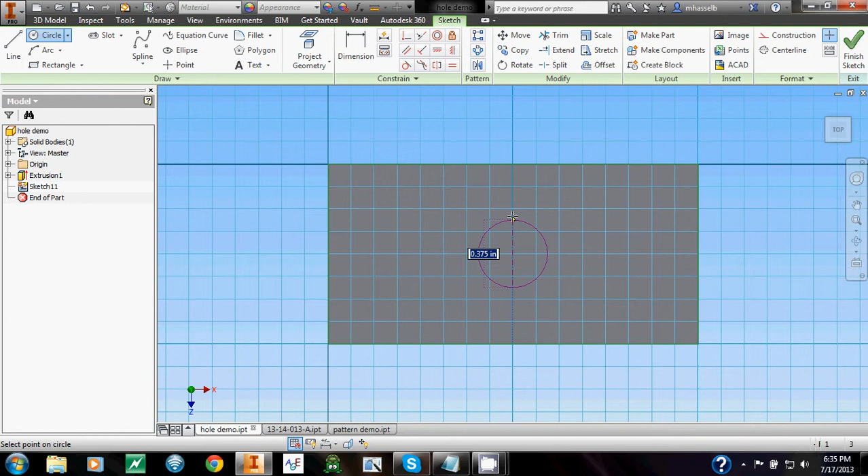So for someone just starting out, you may find that the way to make a hole is by making a sketch, drawing a circle, and making a cutting extrusion. And that works fine, but it has limitations.

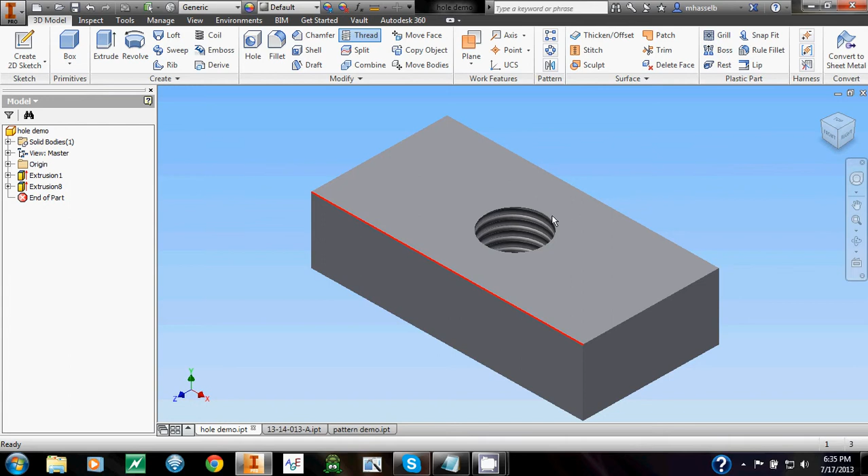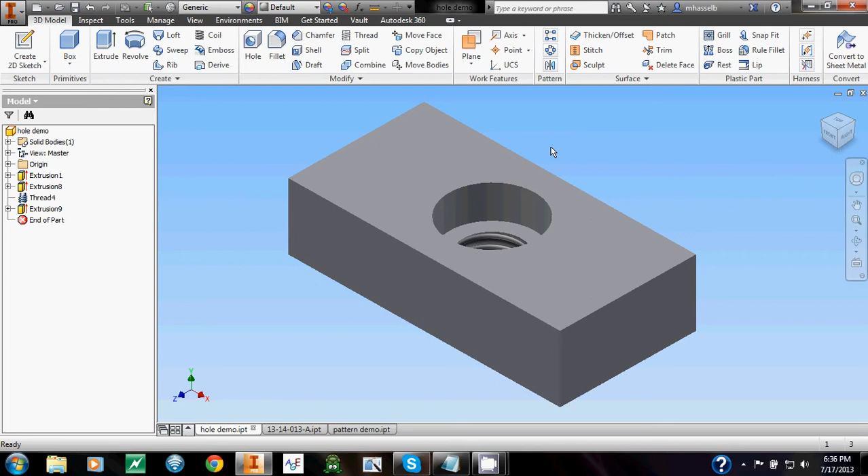Say you wanted to make this a threaded hole. Depending on what thread you want, you may not know how big the diameter of the hole should be. So that's a problem. Also, if you want to make a counterbore, you could also make a circle and extrude that too. Now it's starting to feel like too much work. But say instead of counterbore you wanted an angled countersink, and now it's starting to get really tricky.

So what I'll do is delete the feature and the thread, make a new sketch, and instead of a circle, I want to put down a point. Finish the sketch, and then you'll see this feature appear called hole, and you see it automatically picks up the point you just put down.

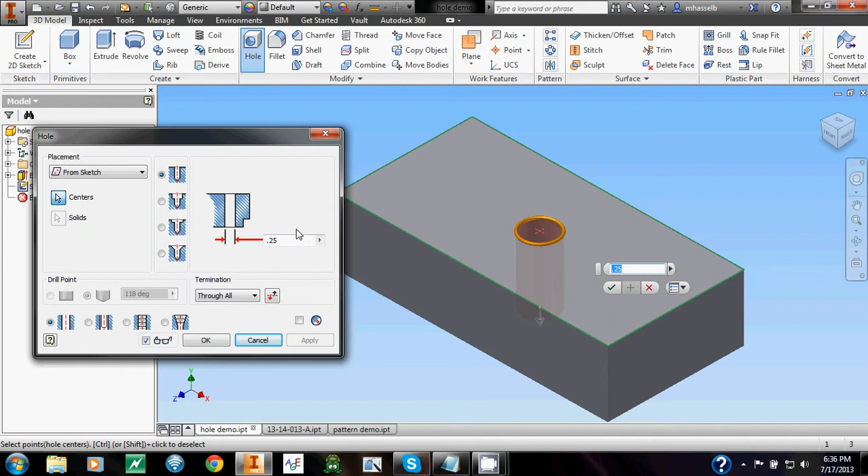It also gives you all these other options. You could make it a clearance hole, give it threads, or this other red thing that I don't know what you would use for. You could make it a drilled hole, add a counterbore, spot face, or countersink, depending on what you want. You can also change the termination and the drill point.

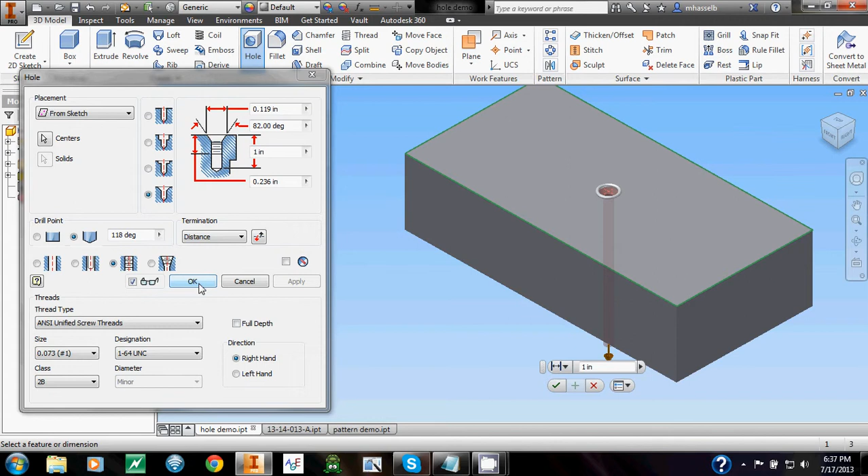So basically everything you'd ever want in a hole is right here, and it's certainly easier than extruding a circle. So now you know how to make holes smartly. Let's move on to patterns with an example.

This is a belly pan, and you'll notice that it has a lot of holes and a lot of triangles. Now you can imagine it would get a little cumbersome to sketch and extrude each of those features individually. I just see a waste of precious time there.

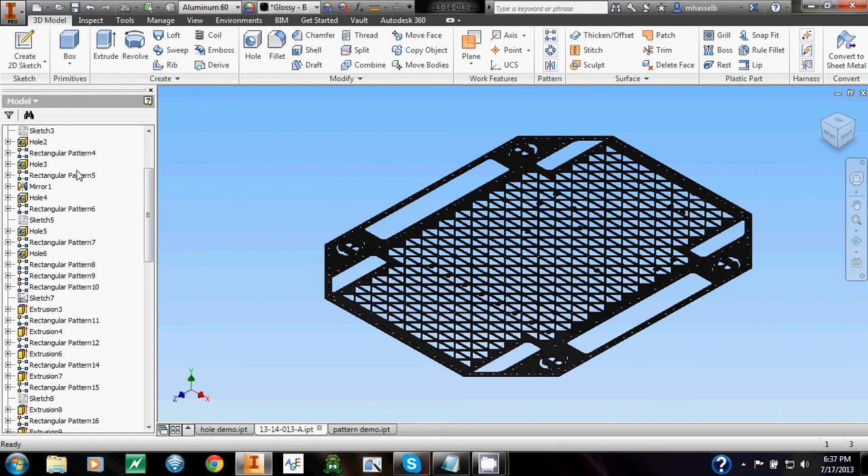So in situations like these, patterns come in handy, and that's what you'll notice in the browser here. This is a sketch I made, and it works well for demonstrating patterns. So I'll extrude this here, use the browser to make the sketch visible, and add some holes.

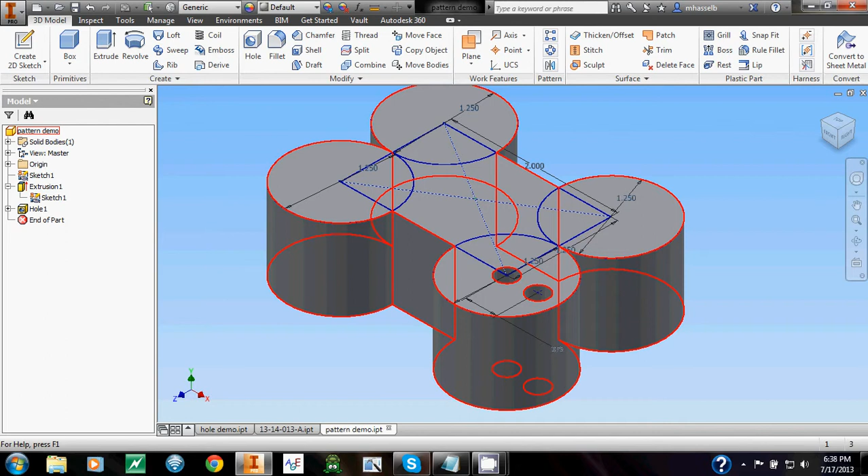So the way patterns work, they're over here. You have different types like rectangular, circular, and mirror. We'll start off with circular. So you see here, you need to choose your feature.

I'll pick the holes I just created, and then you also need an axis of rotation. Once you've done that, it'll give you other options like total number of repetitions, total angle, and whether or not to split down the middle. And so you see how it did that.

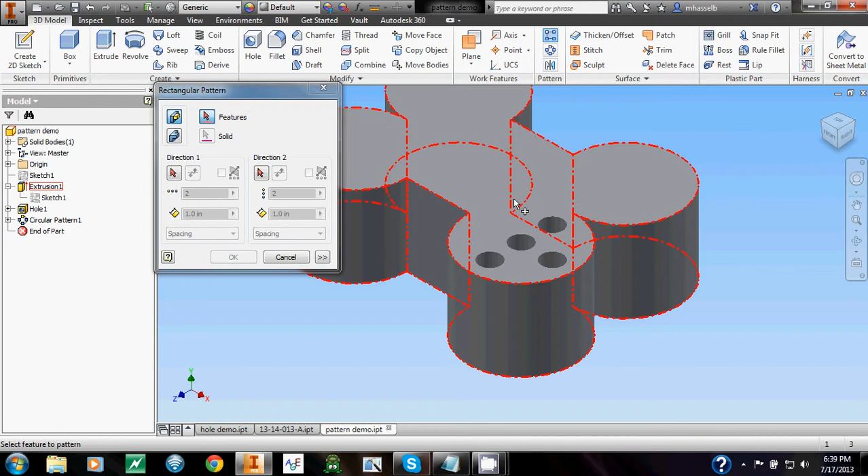In rectangular patterns, it works similarly, except in a straight line instead of a circle. So basically, you need to select the feature and a direction. Directions will be perpendicular to a plane and parallel to an edge. So if I go that way, I can change the direction here, and change the spacing by 0.25. There, it sort of projected all that was there onto here.

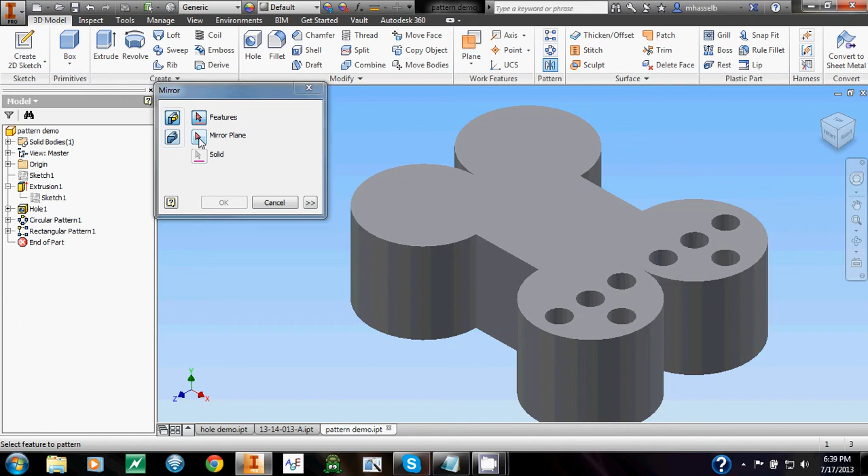And so what's left is mirror. Mirror works a little differently. Besides the features, you need a plane to reflect it off of. For simplicity's sake, I'll just drop down the origin in the browser here and use this plane to reflect. And so it took the features on this side, mirrored them across this plane to give you the features on this side.